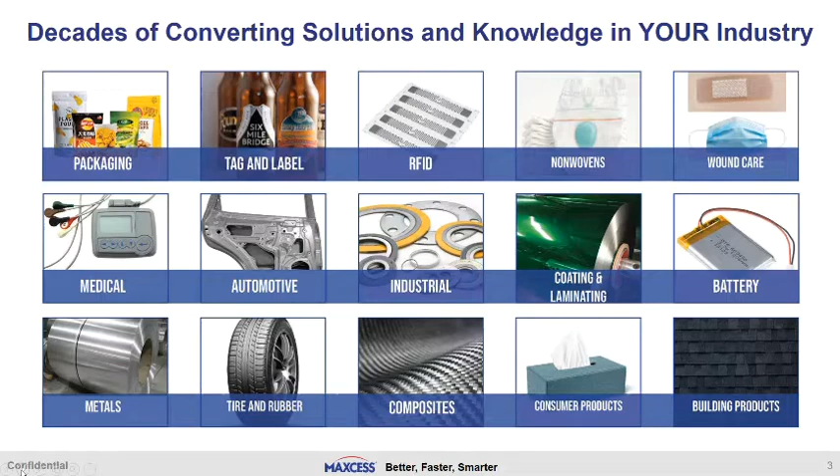and others. Headquartered in Oak Brook, Illinois, Maxcess has a dozen manufacturing and sales locations and more than 2,000 associates throughout North and South America, Latin America, Europe, Asia, India, China, and Australia. Based on this, we can communicate within our customers' languages, cultures, and time zones to provide the right solutions at a local level. And now we will share with you a short video.

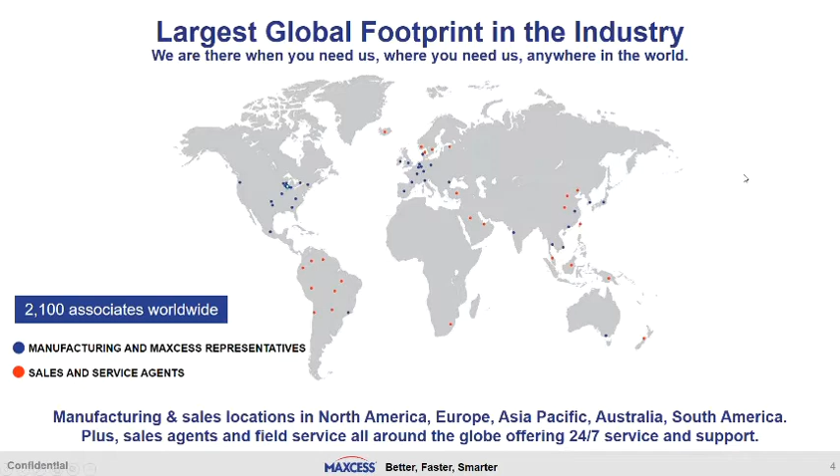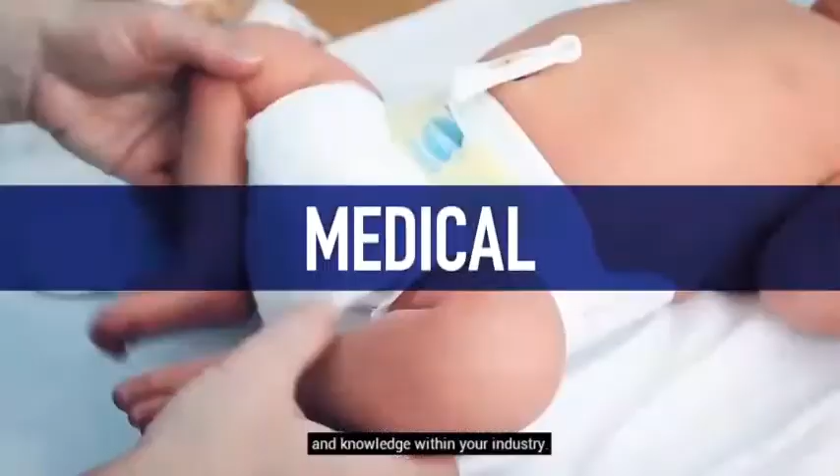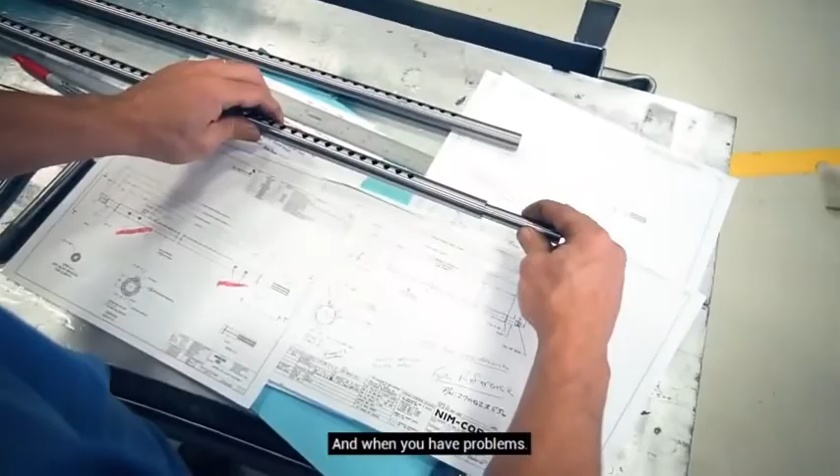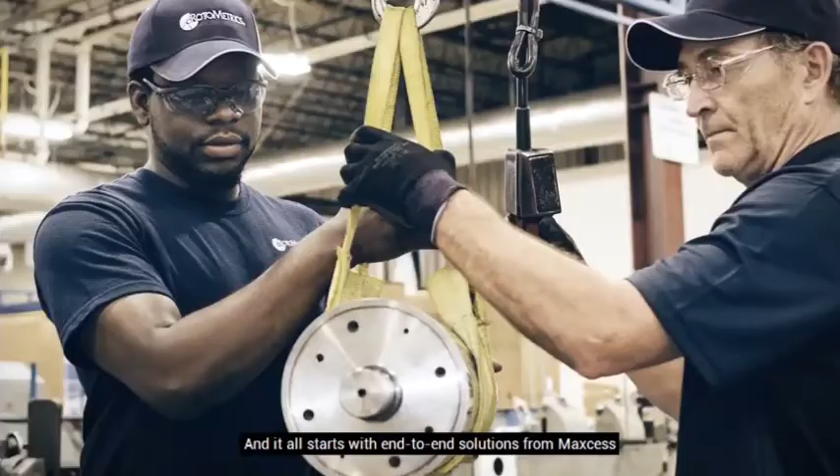Your converting line demands the best components working together. Because it's not just about preventing shutdowns, it's about achieving peak output performance. Maxcess brings together the world's best web handling product brands for customized end-to-end web handling solutions that help keep your converting lines running better, faster, and smarter. We bring decades of converting solutions and knowledge within your industry with a market-leading global footprint, so we're there where and when you need us. In fact, we're on call 24/7 to give you peace of mind, from unwind to rewind. At Maxcess, our experts come with end-to-end knowledge of your converting line. So when you have questions, we get you answers. And when you have problems, we get you solutions faster. To increase press and converting line speeds, for more uptime and increased throughput. And we're proud to say that we're still growing. We're actively investing in next-generation Industry 4.0 solutions to support converting line performance like never before. Because when you run better, faster, and smarter, you get peak output performance. And it all starts with end-to-end solutions from Maxcess. Ask us how we can deliver solutions for your converting line faster.

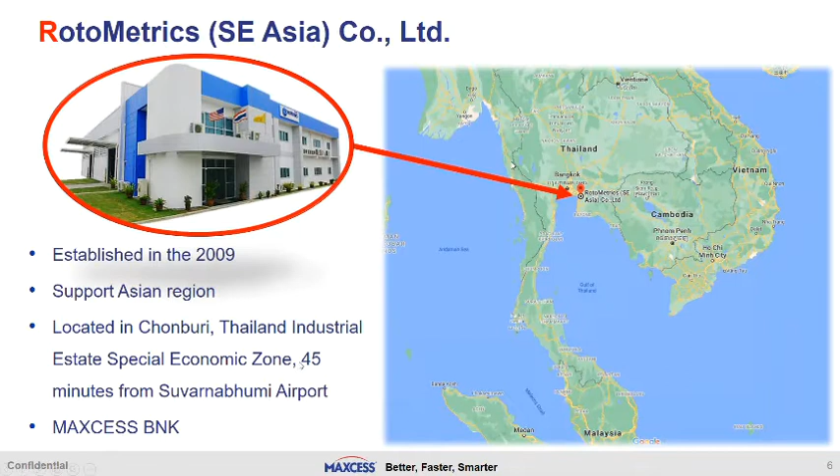And next, why do you want to choose Rotometrics as the partner or supplier? Here is the advantage. The first thing that we would like to focus on is the people, right? The people in our company can support and build relationships with the customer. As you know, Rotometrics has experience in rotary die tooling for more than 60 years. So we have experience in this industry, and also the team in Rotometrics has accumulated experience to support the customer.

And the second one is the reliable solution. We believe that when you have some project or a new application, you may have questions or you may have problems in some applications. So our team gets high-level training and can give you professional advice or answer your questions to solve the problem. And also the internal team, like our CSR team or the technical team, can give you speed, like speed for the quotation, speed for the order, and also our production team can do same day shipment and next day delivery for flexible die orders. And the last one is advanced science creating.

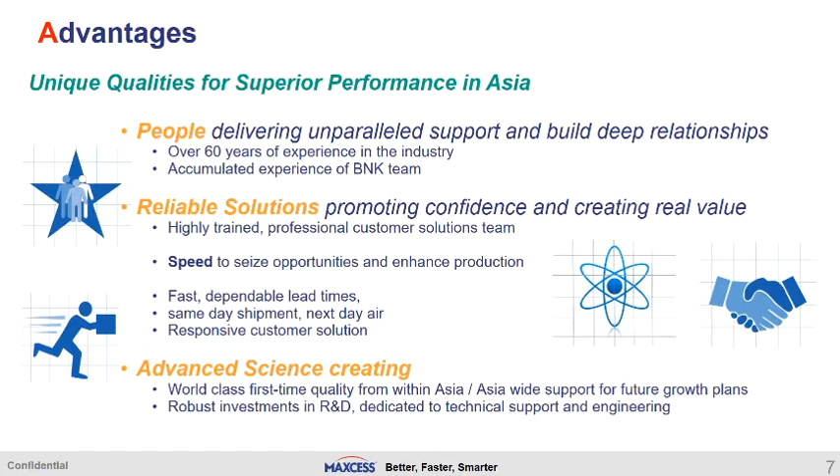We are world class in flexible die manufacturing, producing flexible dies with accurate size and precision cutting, because we invest in research and development to produce flexible dies that can cut many kinds of material, and also we invest in high technology machines to support complex die cuts, to cut aggressive materials in the market.

Let's see our capacity to make flexible die in Thailand. Each year, we can produce more than 50,000 die cuts per year, supplying more than 4,800 customers around the world. We are able to produce about 250 die cuts per day, and 80% of what we supply goes to the industrial label and narrow web market.

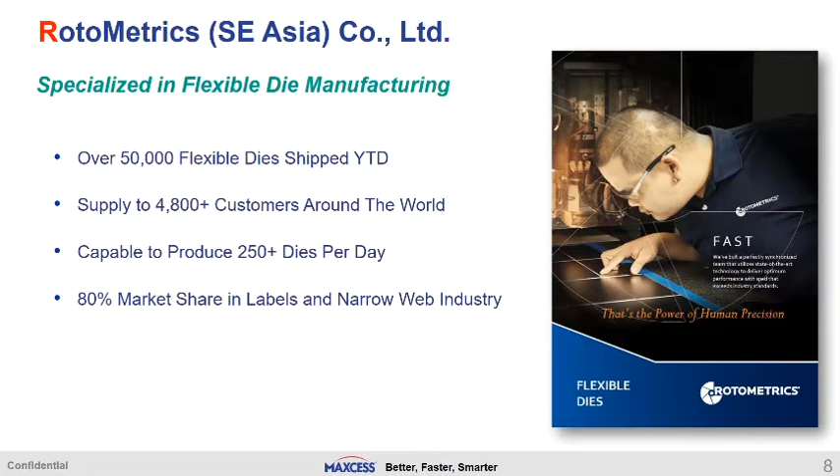Even in our factory, we control the temperature and environment to ensure the die cut we produce for the customer is accurate and gets the right height as per that material. We also have multiple hardened treatment options to make the blade last longer when cutting.

We can hold a tight tolerance on the die cut height of up to plus minus 2 microns only. 2 microns is a very tight tolerance for die cut height.

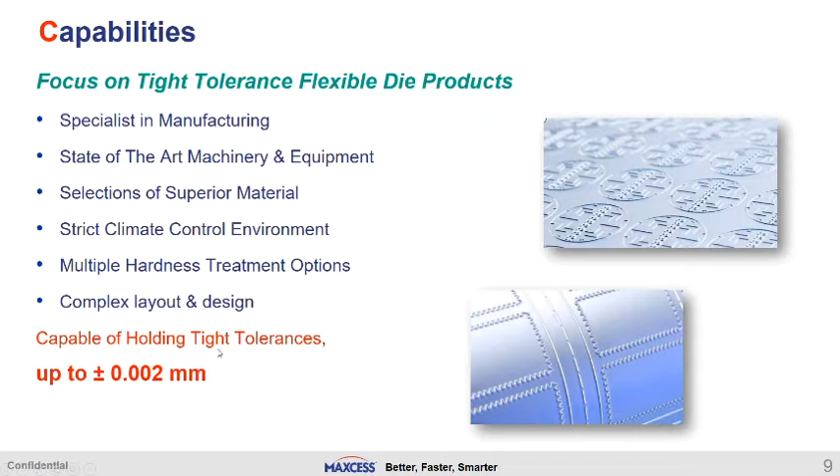They will test with our die cut to ensure that material can be cut using our die cut. We also integrate manufacturing with real-time tracking.

After you order with us, you can track the status of the die cut. Even after the die cut is sent out, we can provide you a tracking number to check the status. Based on our results, we can achieve...

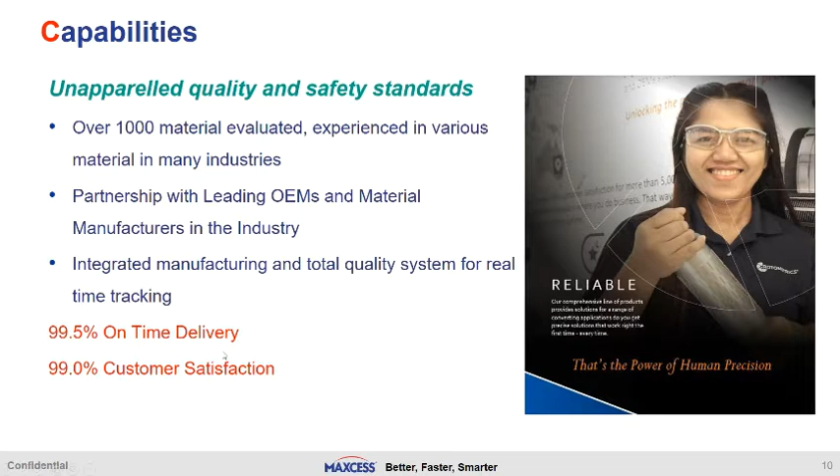99.5% on-time delivery based on the commitment with the customer, and after receiving the die cut, 99% of customers are satisfied with our die cut quality.

Let's see the market share of where the flexible die we produce goes. 80% of the flexible die we produce is supplied to the tag and label, brand, and information industry. As you can see, if you go to the supermarket or convenience store, you will see labels on the products. Almost all of those labels use a die cut like a Rotometrics die cut to cut them.

Another 5% is for packaging like cigarette boxes, snack boxes, and food boxes. They also use the flexible die or rotary die to cut this packaging.

Another 15% is for electronics, automotive, medical, or industrial uses. These cut small or specific parts for electronics or automotive components. Some parts used in this kind of industry also use the flexible die to cut them. This gives you an overview of the market share of products the flexible die is able to cut.

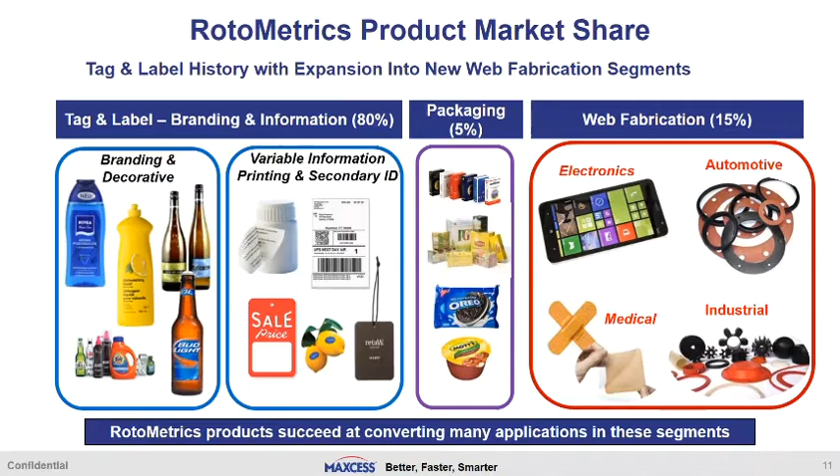For this one, we would like to show you about the printing machine. Rotometrics does not produce the machine itself, but we produce the tooling or accessory parts to supply to the printing machine. We want to be a one-stop shop for customers who are using the printing machine. Let's see which parts Rotometrics supplies to the printing machine.

Print cylinder and sleeve, this is located at the printing station. If the machine requires a print cylinder or sleeve, Rotometrics also supplies this tooling for the printing machine.

Let's look at the die cut station. This includes a solid die anvil, or if you use a magnetic cylinder, we supply that together with the flexible die. These are component parts for the die cut station, along with accessory parts like a Hydra Jack pressure gauge, which Rotometrics also supplies.

There are a lot more parts than this that we supply to the printing machine. If you have any requirements or questions you want us to support, please feel free to tell us so we can support the tooling on the printing machine.

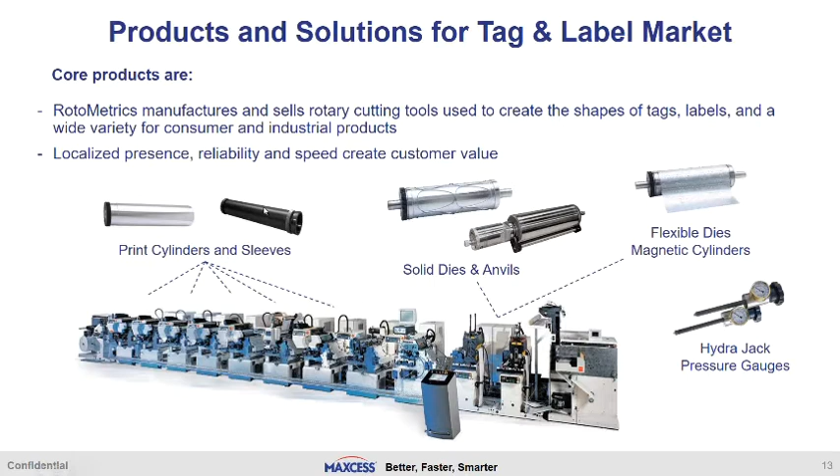Next, we would like to explain to you about each type of flexible die. Maybe some people already know about flexible die, but may not know how different each type is, so today we will explain it. The first one we call AccuSmart. AccuSmart is the budget type.

If for a short run project, for example, you've got a trial running for your end customer, you can use the AccuSmart. AccuSmart is suitable to cut simple material like paper or simple cutting film. This is the best choice for a budget-friendly start.

If you would like to increase for commercial running, we recommend AccuPrime. AccuPrime is a middle grade die to cut many kinds of material like paper or film, and it can also be coated like laser hardened or chromium to get a longer blade life.

And the top line products, AccuStar Life and AccuStar Ultra Film. These are top line products. Let's see AccuStar Life first. Life means getting a longer life.

This one is suitable for thermal paper. Thermal paper is quite an abrasive material, so it will make the blade blunt easily. That's why we produce the AccuStar, to support cutting this kind of material. If you use a normal die cut like AccuSmart or AccuPrime to cut thermal paper, it will have a short life. That's why we have AccuStar, to support this type of material.

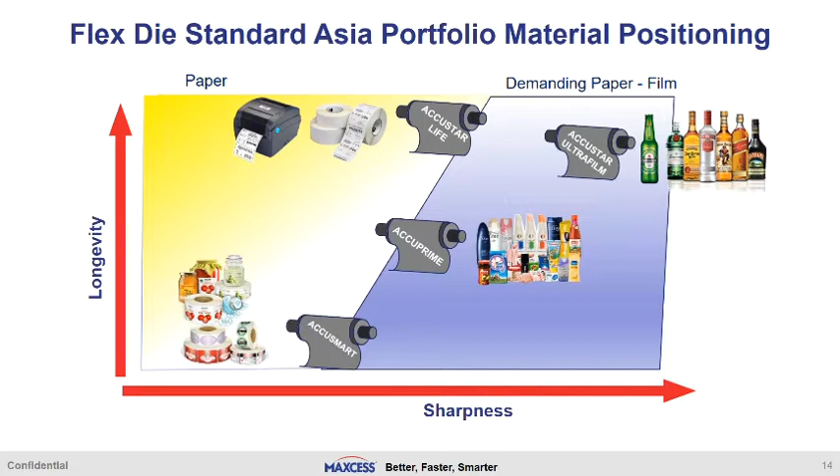So as a customer, you may not need to remember all the types of flexible die, but we have the team to support you. Just give us your material spec so the team can select the most suitable die cut type for you. And next, we are cutting in the tag and label industry.

This problem can be solved by using RotoRepel, no-stick coating. Roto Repel is coated on the surface of the flexible die or solid die. While you are running, the adhesive will not stick on the blade angle, so you don't need to stop the machine to clean the blade. You can continue running until you finish the project.

Our Roto Repel is different from traditional non-stick coating because our coating is a clear coating, so it will not chip out or flake. And Roto Repel can be applied to the flexible die and also the solid die.

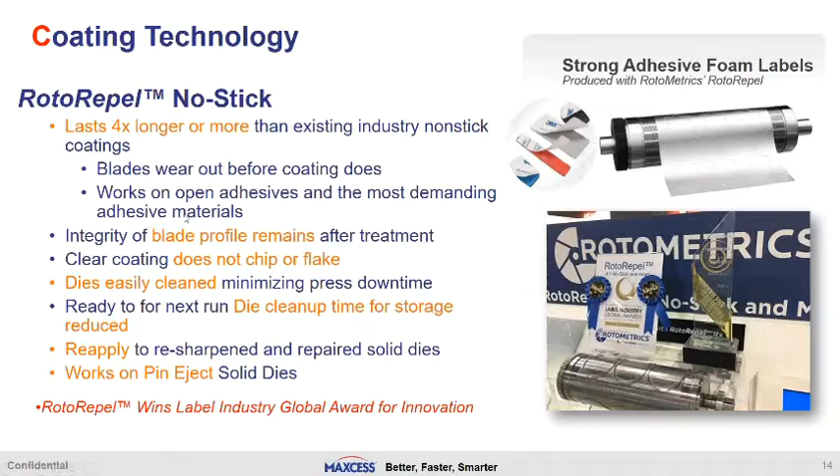And next, before we go into the detail of each part of the die station, we would like to introduce the component parts of the die station. The first one is the Hydra Jack pressure gauge.

Some stations may have the pressure but don't have a gauge. We would like you to get the pressure with a gauge also, so you know which pressure you're using on each side. The second one is the rotary die or the magnetic cylinder together with the flexible die. Please ensure the bearer on each side is in good condition, not worn out or with damaged surface, to ensure good quality cutting.

The anvil also - the overall surface of the anvil should be smooth. Underneath the anvil we call the felt wiper assembly. This part is small but very important because it lubricates the station and reduces temperature, since the magnetic cylinder and anvil running together can create thermal expansion and also metal waste. So the felt wiper collects the metal waste, collecting something dirty from the cylinder and keeping it there, so you can notice it and then put oil there to lubricate the cylinder.

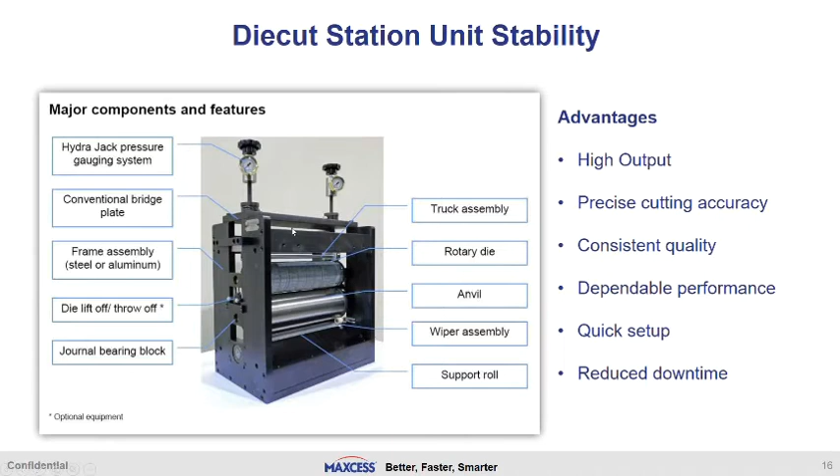Okay, please check your station - do you have this one or not? This is the good function of the die station to get good quality cutting.

Okay, next we would like to focus on the magnetic cylinder. Premium cut means you have to get the right flexible die plus the quality magnetic cylinder. Our Rotometrics, we also focus on the magnetic cylinder.

Magnetic cylinder bearer, should be hardened. Also the surface, the body of the magnetic cylinder, Rotometrics material, is made by stainless steel, to avoid rust. If there's rust on the body, it can cause uneven cut or deep cut for the flexible die.

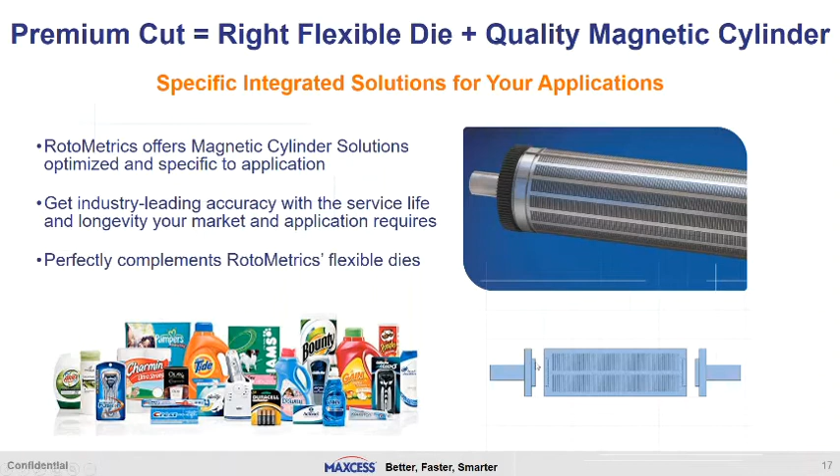Also, our magnetic cylinder is separated into 3 parts: bearer, body, and bearer. In the future, if the bearer worn out, you can change only the bearer, to save your cost instead of investing in a new magnetic cylinder.

Okay, next, this one is the anvil. Normally sometimes you have a base anvil that cannot move, right? This one has the function that the anvil can be adjusted. We call it the adjustable clearance anvil, or ACA.

We have 2 types. The first one is the ACA which can be adjusted up and down. For example, if the material cuts too deep or cuts deep on the liner, you can adjust the anvil going down. This means the material will go a little bit further away from the die cut height, so the result of cutting will be lighter.

But if you found that it cannot cut deep enough, you can adjust the ACA going up, so the material will reach more of the die cut height, so the cutting will be at the right level that you want. Okay, for the top line function, we call it the VersaCut adjustable anvil.

VersaCut adjustable anvil - we designed this because some customers may have the problem of finding a deep cut at the gear side only, while the other side is okay. So you can adjust only the gear side going down, while the other side still maintains. This means you can solve the problem on only one side of the cylinder.

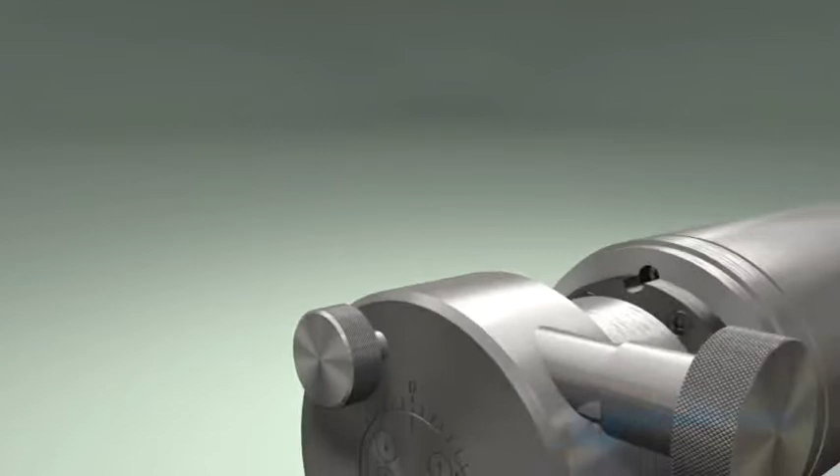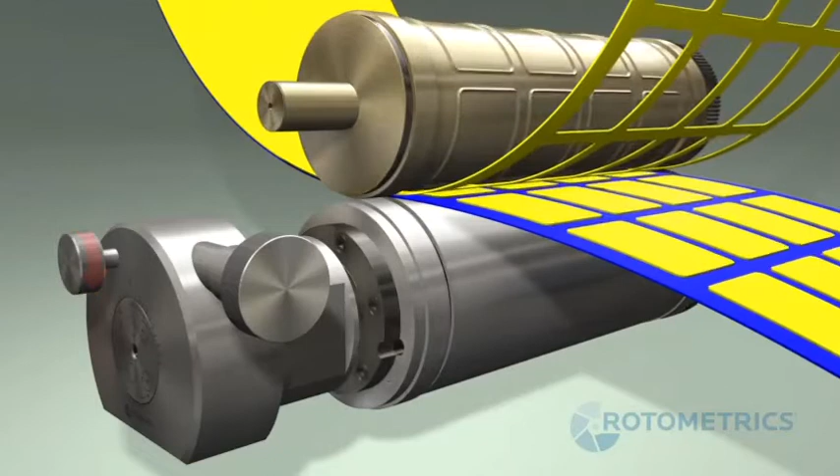Okay, this one is the ACA. This shows that it cannot cut. So you can adjust the size of the cylinder - the body of the anvil will go up and then make the material reach the blade, so the entire material can be cut. Okay, I will show you another one, the VersaCut adjustable anvil.

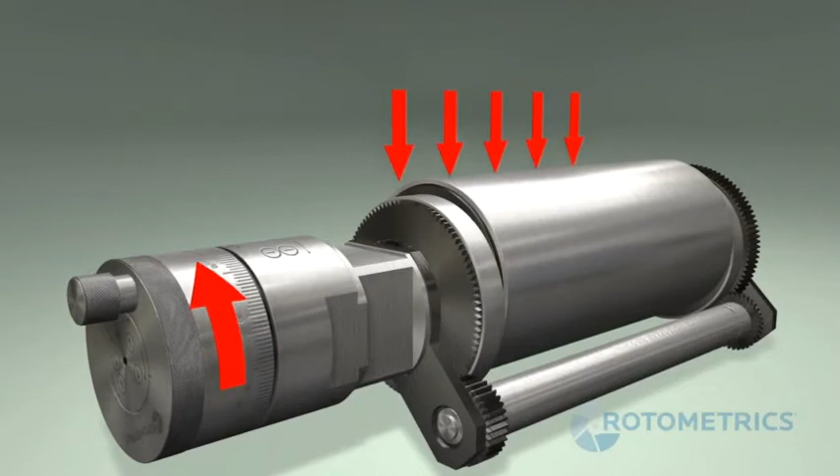Okay, this one can be adjusted up and down, and also the operator side up, operator side down. For example, after cutting, if you found the operator side cannot cut, only the operator side, you can adjust it going up, so the entire material web will be cut perfectly. Okay, this is an example.

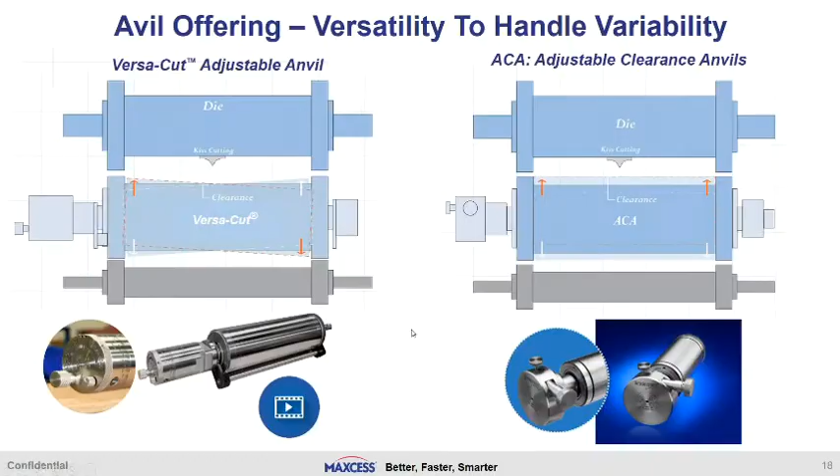Okay, let's go on. For the printing cylinder, we have 3 types of material. The first one, we call the standard print cylinder, is made from aluminum. This one is good for the budget type and can be manufactured very fast. If you have a small volume, we can complete it in 3 to 5 days. This is an economy choice if you would like to start with the standard print cylinder.

But if you would like to get the hardened print cylinder, we call it the Rotoguard print cylinder. This one is coated with hard anodize - our hard anodize is in-house, so we can control the quality and the lead time. The hard anodize helps protect against scratches or corrosion to avoid surface damage.

And the top line product, we call the Rotoguard XT Print Cylinder. This one has an exclusive anodized coating, giving hardness for the surface of the print cylinder up to 15 times stronger than normal hard anodized. So if you would like to use it for long-term production or use this type of print cylinder very often, we recommend the Rotoguard XT because it's very valuable to use for a long time.

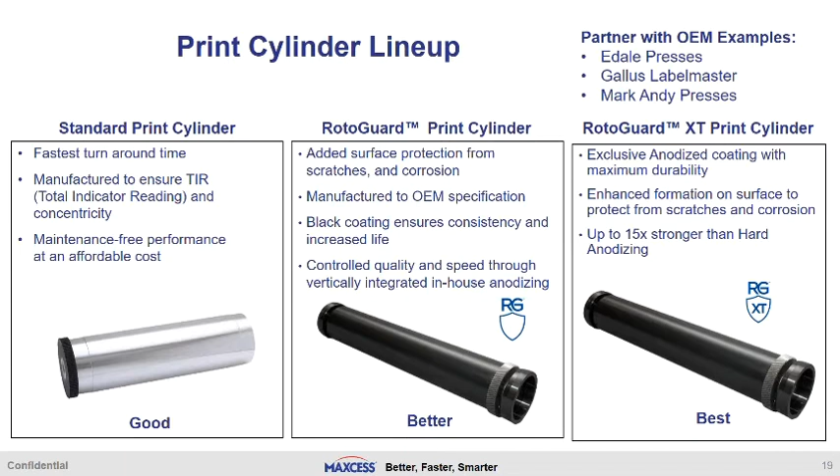Our print cylinder has been certified by many OEM machine makers like Edale, Gallus Labelmaster, Mark Andy, or other machines that certify that our print cylinder can fit with the machine. Okay, next we would like to introduce you to the solid die, right?

For some functions you may need to use the solid die or the flexible die, but we would like to compare how the solid die and flexible die are different, right? The solid die is used for the long run because the blade height is hardened or longer than the flexible die. The flexible die is used for the short run. The flexible die is used only once and then discarded or disposed of, but the solid die can be repaired and then you can reuse it again.

For the flexible die, the regular shape can change, but for the solid die, the shape cannot change. If you would like to change it, it means changing the whole cylinder. Okay? The flexible die is almost always used for thin material, thinner material. The solid die is used for thicker material. The flexible die is used for kiss cut or half cut. But the solid die is almost always used for metal to metal cut or full cut, right? The point is that the solid die can do a material movement option, right? We will show you the advantage of the solid die.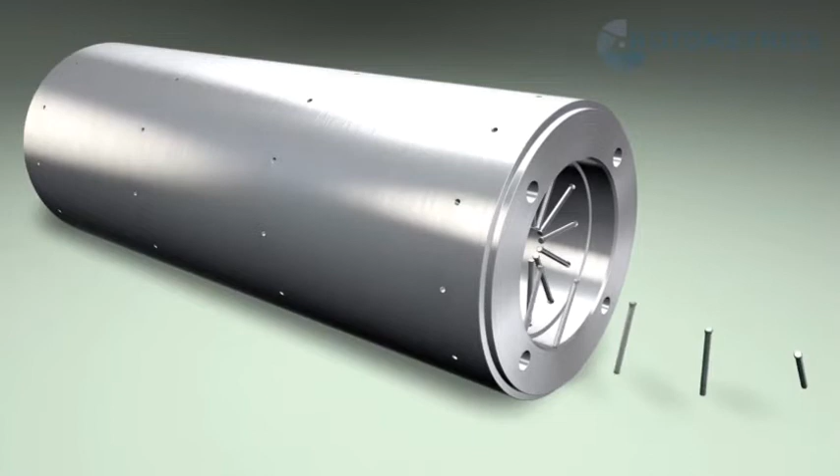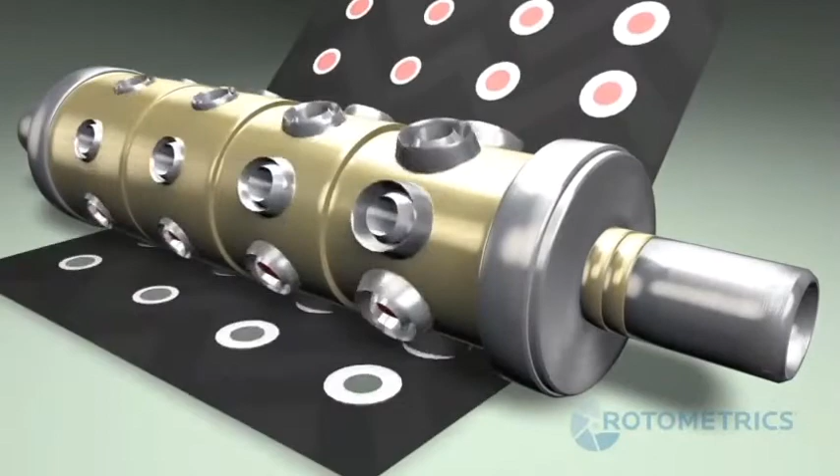This one is a pin eject. We arrange the pins based on the hole cutting and then put the rubber so the pin can move inside the cylinder. After cutting, the pin ejects the waste out from the cylinder. Okay, this is the pin eject function. Another one, I will show you the vacuum die. Okay, for the vacuum die, it means after cutting, the waste will be vacuumed inside the cylinder and then released out at the journal. Okay.

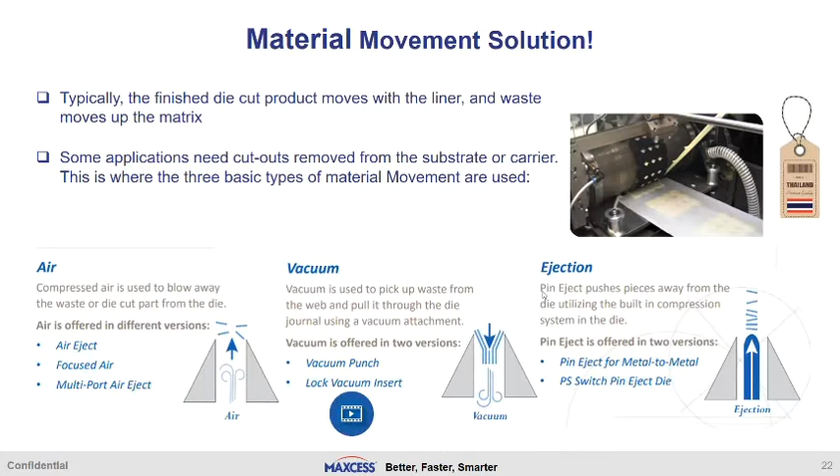And next, the last part of the first part of Rotometrics is that we would like to introduce the additional products, right? Okay. The first one is the removable blade sheeter. If you would like to cut sheets, like an A4 sheet, something like that, you can use the removable blade sheeter. We have a perforation blade also. If the blade gets bent, you can change it at your side by yourself, because the blade can be removed and then you insert the new one.

Vari score cut or the vari punch unit. With this one you can cut like slitting on your material. But the good point of this one is that you can locate the position of the cutting that you want on the material web, or you can remove it and insert a new shape of cutting. The operation of this cylinder is like the solid die or the flexible die, but the good option is you can change the blade, remove the blade, or adjust the position of the cutting that you want. And this one is the razor slitting unit. This one is for slitting the material width based on your requirement.

If you would like to slit the small width of the material after you're cutting the sticker or the label, you can install this type of part at the end of the machine.

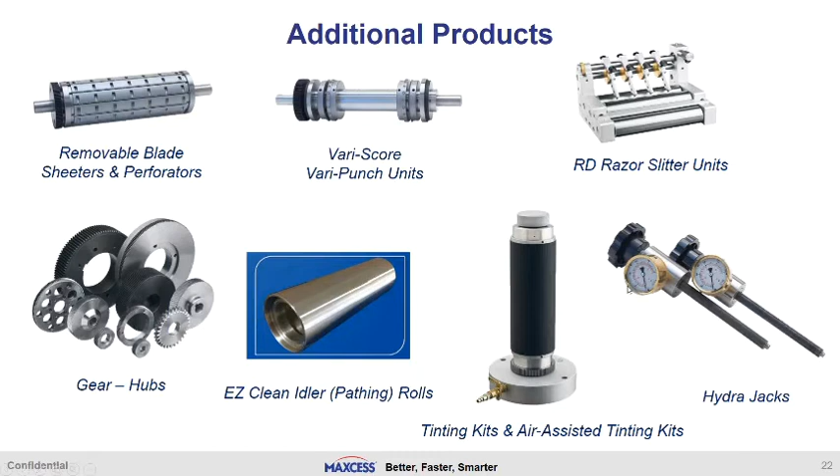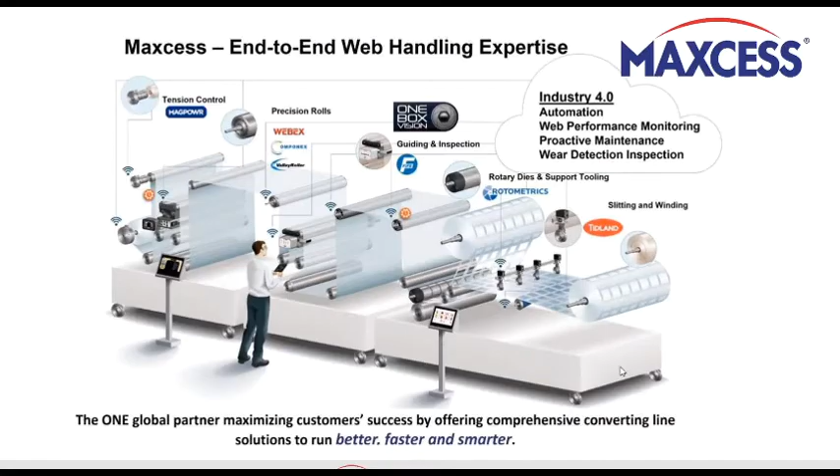Hello everyone, thank you Chavalit for this nice presentation of Rotometrics products. Now we will move on to our second part, about our other Maxcess family members. First, let's start with our Maxcess brand MagPowr. MagPowr is well known for their tension control solutions for more than 45 years. The tension controls are used at the unwinder, but also at the rewinder of your web processing machine.

Second, we will move on to our precision roll brands Webex, Componex, and Valley Roller, which offer the complete range from simple idler rolls to heavily engineered heat transfer and vacuum rolls. Then we will move on to Fife. I think Fife is really well known on the market. It's our trusted brand for web guiding and web inspection solutions for all kinds of materials. For Rotometrics, I think Chavalit introduced our capabilities for rotary dies and support tooling really well, so this was already done for this webinar.

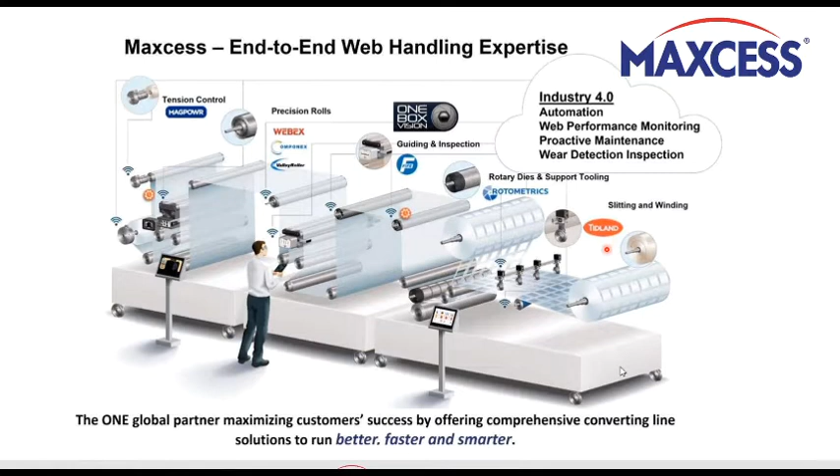Then we will have a look at our slitting and winding solutions. Here's our brand Tidland, which is also really experienced and has a wide product range from simple air shafts to complete automated slitting systems. And lastly, we will have a look at our new brand OneBox Vision. The OneBox Vision system is for web inspection applications.

When we talk about guiding solutions, the first question is who needs web guiding? The answer is any web processing line which demands an accurate placement of its web. That means web guiding systems are used in a really wide range of processing lines, for example coating machines, laminators, bag machines, slitters, carpet lines, corrugators, diaper machines, sausage casing machines, and of course also in narrow web, for example in printing presses.

Typical reasons for the need of a web guiding system can be poor quality materials like a badly wound roll, any kind of web shape issues, rolls out of alignment like telescoped rolls, sudden tension changes in the material's cross-section, or external forces applied to the web which lead to its displacement.

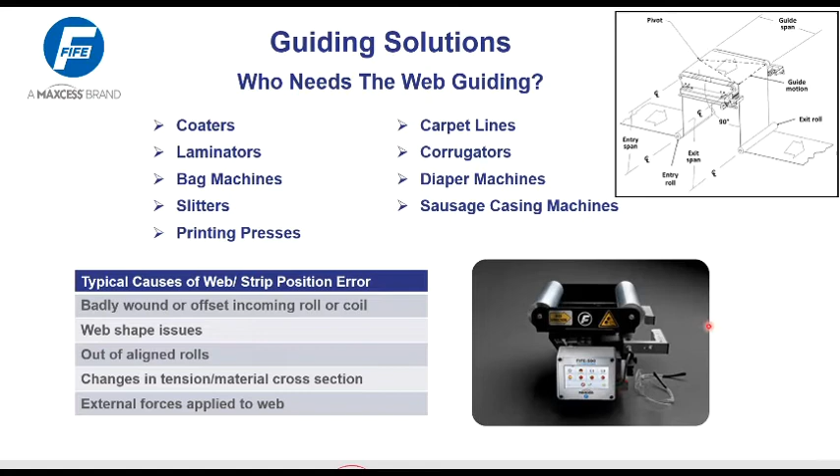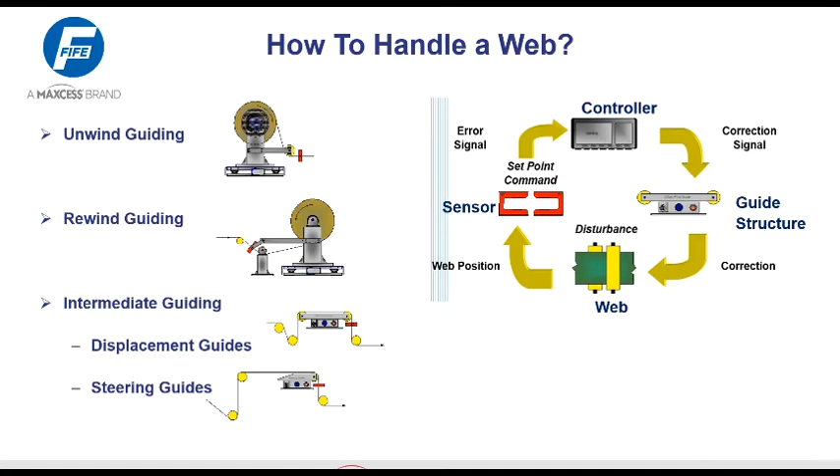To give you an understanding of different web errors, I would like to show you a short video clip. The first sample shows a well-wound roll where the guide system only adjusts slightly in the beginning to realize the desired web position. And in the second sample, it is a bit more complex. You will see a poorly wound roll where the guide structure needs to react rapidly to realize the desired web position.

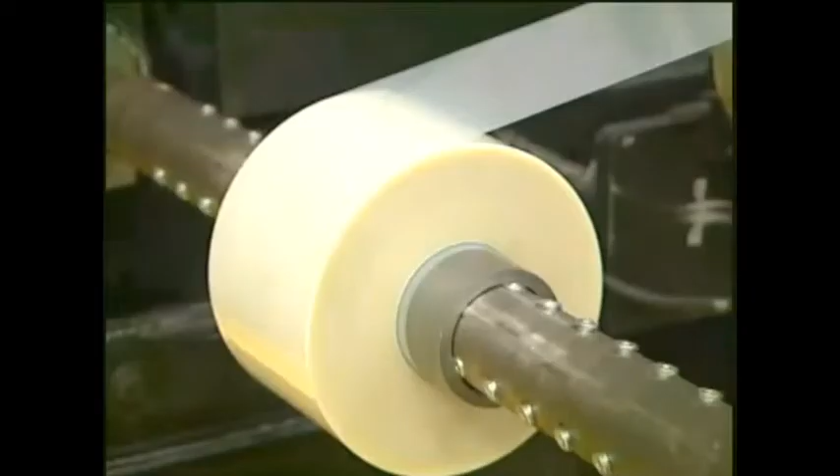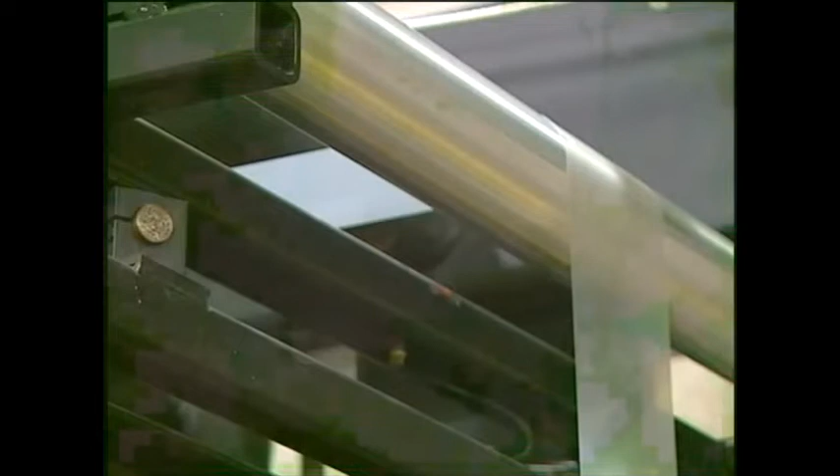Of the edge of the material on the roll. However, this near-perfect roll is shifted 0.5 inches left on the shaft of the desired alignment on the processing machine. In this scenario, the guide will take on an angle such that the material is shifted right 0.5 inches, and then you will see virtually no movement of this guide during the unwind of the roll.

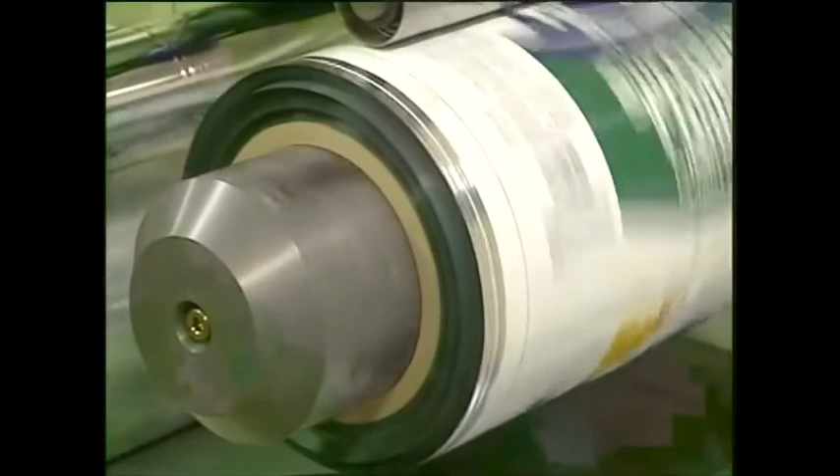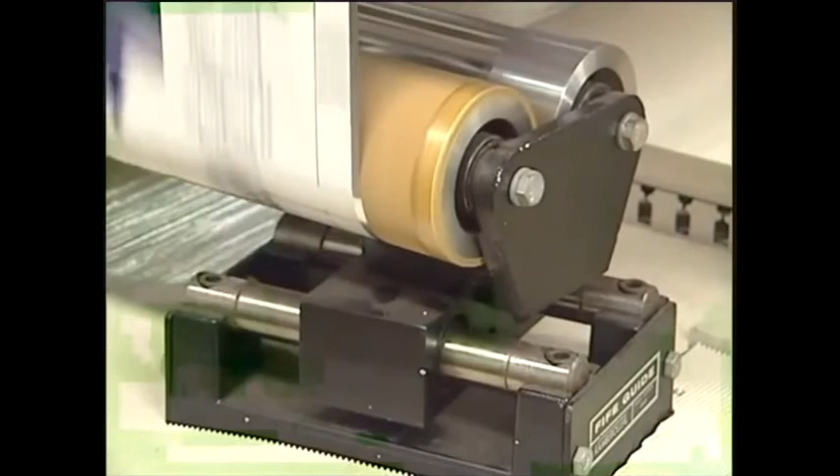Example 2. The roll being unwound has a very irregular edge where the material wanders back and forth on the roll. When the guide adjusts for this roll, you will see the guide actively swing back and forth, correcting for the variations in the edge of the roll. In both cases, the guide is helping to ensure that the material is properly positioned as it leaves the guide. In one case, the guide makes a single positional adjustment and then hardly moves. In the other, the guide needs to constantly adjust position for the wandering edge.

So Maxcess guiding components are defined in each case to meet your requirements. We separate into the 4 main components. First, we have our controller, which processes the signal from the sensor. For example, our 5500, which uses brushless motors, so you have reduced maintenance. Then, of course, the sensors. Fife has many different sensors in their portfolio, which simply identify the lateral error of the incoming web and report this information to the processor.

Several different sensors are offered from Fife. For example, IR sensors, they generally are suitable for opaque materials, but also ultrasonic sensors for clear materials and some opaque materials. Then we also offer pneumatic sensors, often used in high temperature places, and other application-specific sensing methods, like the DAC005 camera, digital camera sensor. You can see a picture from this sensor here. And this one is suitable to cover a range of difficult to sense materials from nonwovens to steel. All of those sensors should have a high sensing resolution and a quick sampling rate to ensure a high response to the system.

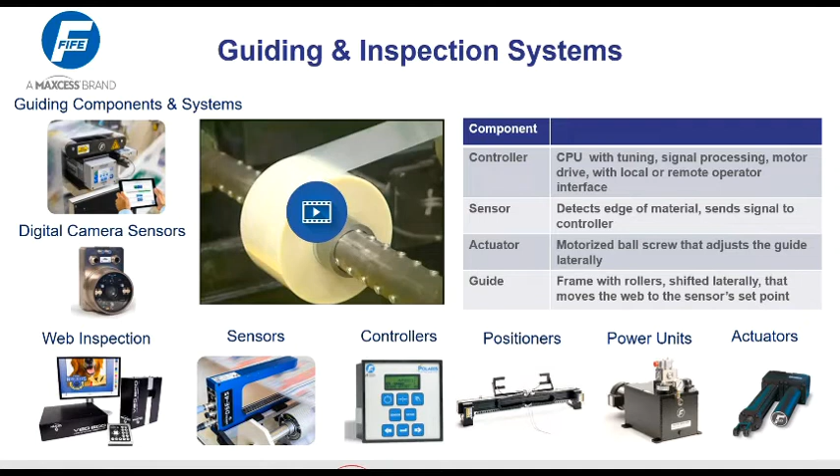Our Maxcess brand Magpowr offers the full portfolio of tension control solutions, from load cells and readouts, pneumatic or magnetic particle clutches and brakes, as well as control units for your application. Tension control systems can be located at the unwinder or at the rewinder, or as a point-to-point tension control, which can be anywhere in your production line.

A typical problem which can occur caused by a too high web tension at the rewinding station are crushed cores, which are too tight to be removed from the shaft, or maybe you know also the problem of telescoping rolls caused by a too low tension. You can avoid this by using our Magpowr equipment. With taper tensioning, gradually reduce the web tension as the roll diameter grows. So that means the diameter at the outside of the roll has a lower tension than at the inside. And this can be simply realized with a percentage taper setting at your Magpowr controller.

That really helps to improve the quality of your rolls, reduces the amount of scrap, and lessens your frustration due to waste of time. Magpowr offers different types of control systems, such as the manual control system as a low-cost solution, where the operator is responsible to adjust the tension to keep it constant.

And on the other hand, there are also the automatic systems, which are separated into open loop and closed loop systems. The open loop system doesn't give feedback, so they have a lower accuracy compared to a closed loop system. In the closed loop system, the output is continuously measured and gives some kind of feedback to the controller. This makes the closed loop system the system with the highest accuracy.

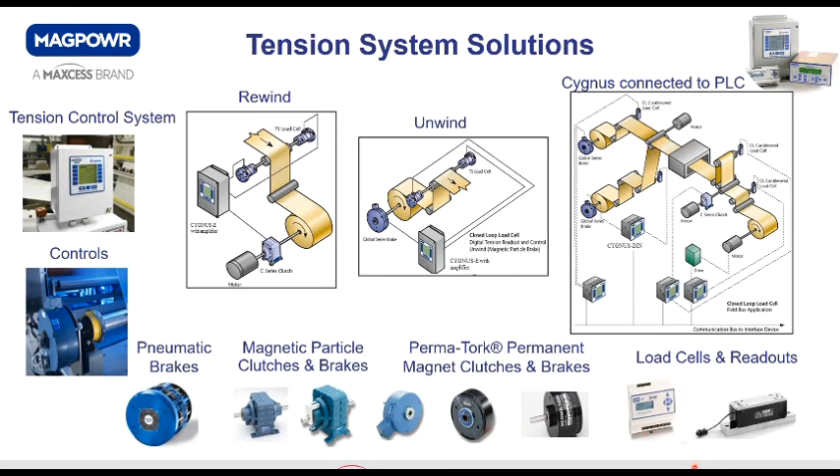And Tidland offers, of course, also a wide range of slitting blades, from simple stocked standard blades to specifically designed blades with selected materials. Our standard blades come in diameters of 90, 150, and 200 millimeters. Also, other slitting accessories are available, such as the 360-degree blade guard for our performance and control series, to ensure that the slitter blades are completely covered when retracted.

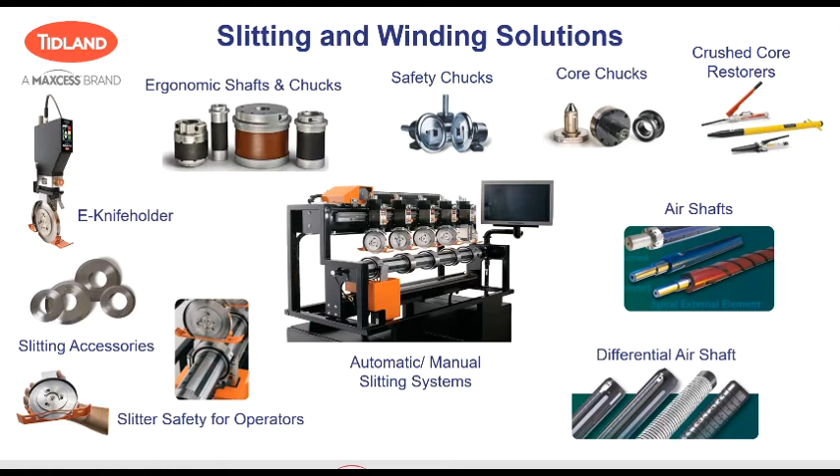The WINertia AV roller with the incorporated air vents lets air escape and therefore can maintain a constant web traction at speeds of up to 3,400 feet per minute. Because of this constant web traction, the rolls don't slip, and this prevents your web from scratches and sliding in your web processing line. And of course, it will also help to avoid misregistration during the printing process.

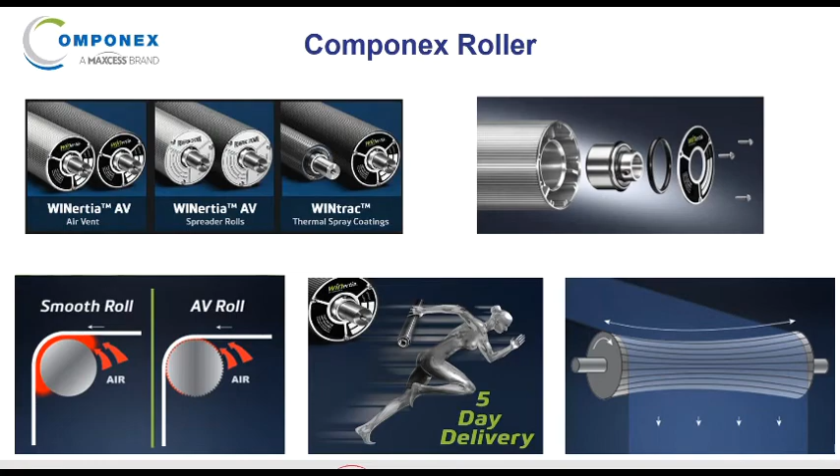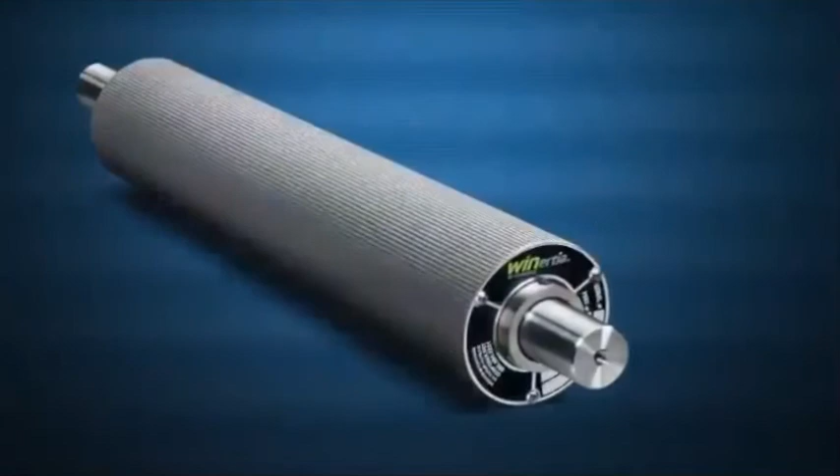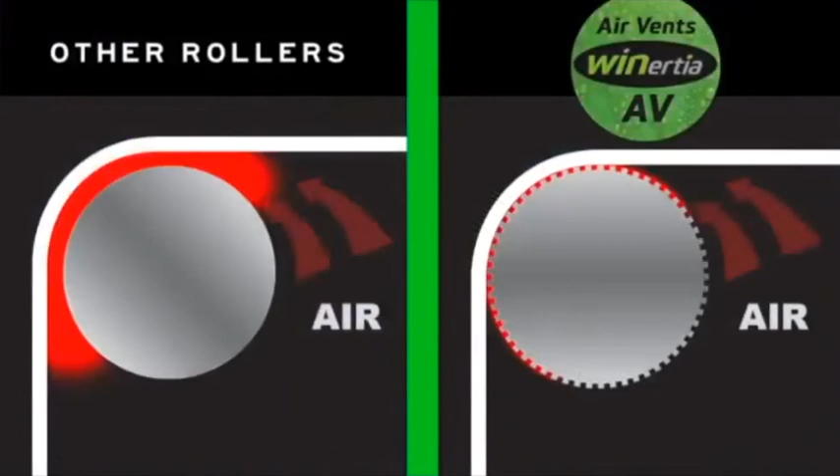The WINertia AV roller was specifically designed to provide 100% traction by displacing the air that gets trapped between the roller and the web. Without displacing the air, the roller will lose traction with the web and start to slip. Slipping causes web damage, misregistration, and premature roller surface wear.

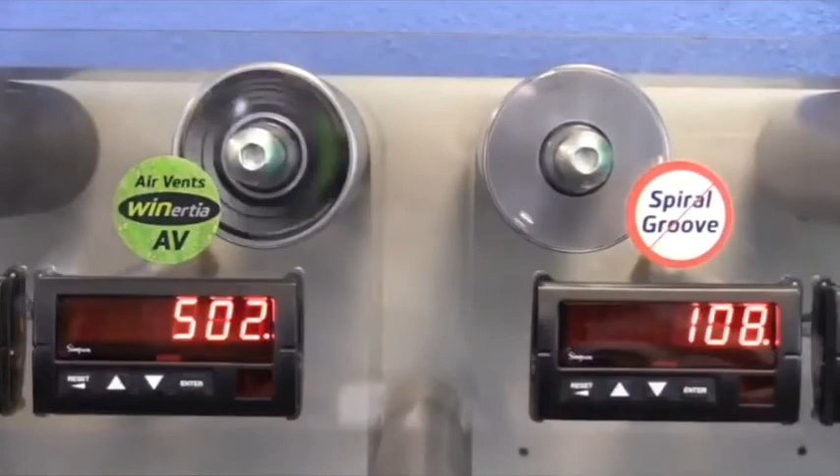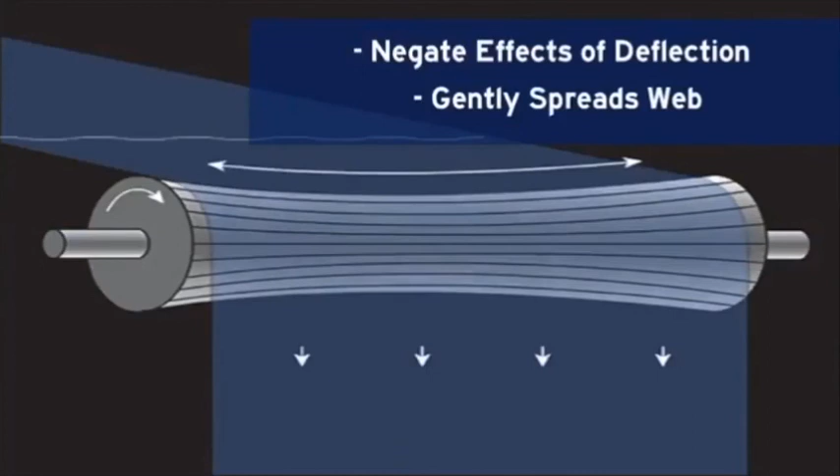Spiral groove rollers do not have the capacity to displace the air. The air does not have enough time to escape into the grooves, which is why spiral groove rollers lose traction when running at high speeds. AV rollers can be designed to spread the web. A reverse crown profile is machined into the roller, negating the effects of deflection and gently spreading the web. We recommend the reverse crown profile for most applications.

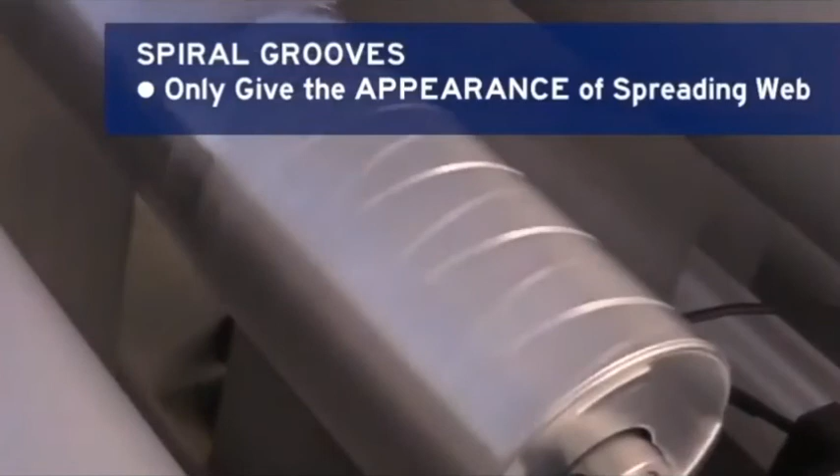Spiral groove rollers have the appearance of web spreading, but do not actually spread. Rather, as tension is applied, the web is pulled into the grooves. This causes the web to trough and condense. This will affect the finished product during the rewind.

AV rolls are backed by our performance guarantee. You can purchase one of our rollers from us, test it out for 60 days. If it does not meet your expectations, it can be returned for a full credit.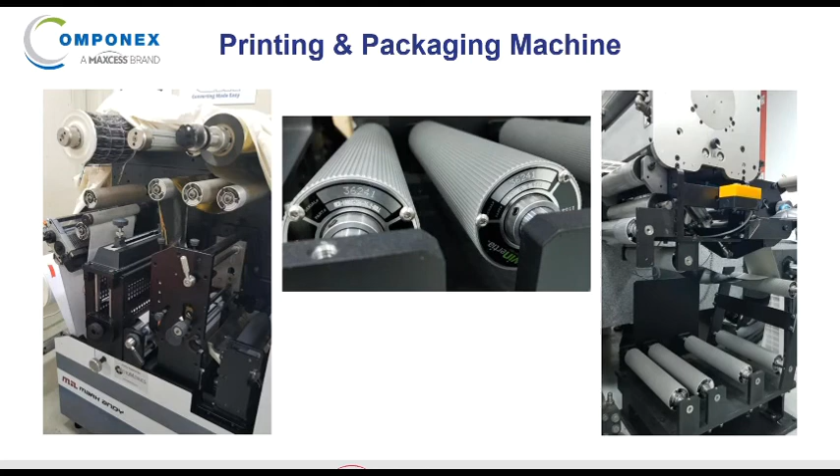So the next Maxcess brand is called Webex. Webex is a specialist for all kinds of precision rollers throughout your web processing line. Webex joined the Maxcess family in 2014. They have around 240 employees. They have rollers for film and sheet processing lines, for converting lines, for the food industry, paper, and of course also for the printing industries.

Webex heat transfer rolls are available in single or double shell design with a size range from 2 up to 48 inches and length of up to 511 inches. Also here, different surface finishes are available, such as chrome, nickel, rubber, ceramic, or Teflon coatings.

But that's not all. Webex also produces vacuum rolls. Those are ideal for applications where a contact of both sides of the web is not possible, but proper traction is required. The complete design, including the hole sizes and the hole patterns, is customizable. And with the adjustable deckle design, we allow different web widths to run on the same vacuum roller.

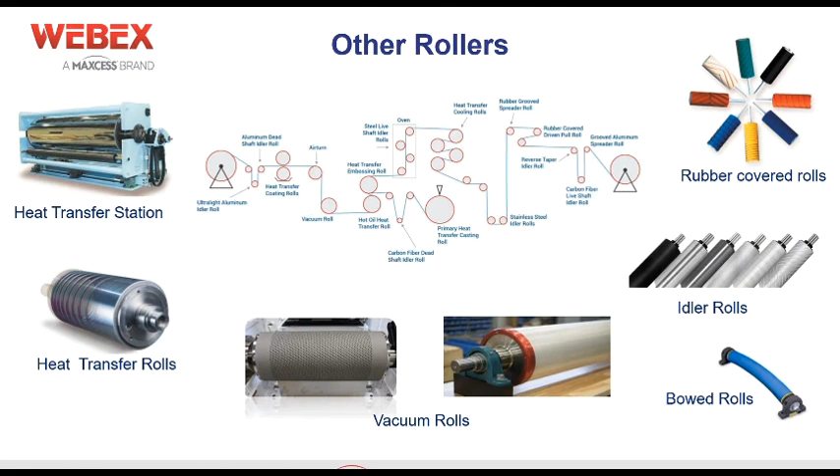The newest member of the Maxcess family is One-Box Vision. One-Box Vision delivers machine vision solutions built using off-the-shelf technology and open systems software. The solutions are optimized to the application requirement, which leads to an unmatched value in your process. One-Box Vision realized projects such as gel and carbon spot inspection on extruders, but also detection of contamination through dust or insects.